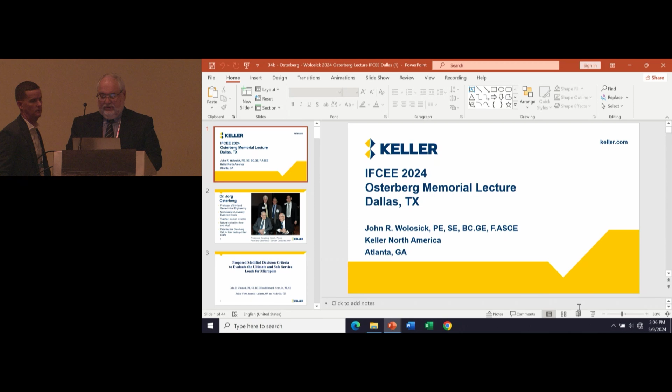Thank you, Paul. Let me figure this out here real quick. Oh, does it keep going? Yeah, no, I think I'm okay here. I think I'm good. Okay. Okay? Yeah, got it, Matt.

All right. I was telling Teresa ahead of time, I'm usually a wing-it guy, but in this particular case I probably over-prepared. But I'm honored to give this talk. As Paul mentioned, a lot of great people have given the talk in the past, and a lot of them are friends of mine - Dr. Erik Loehr from the University of Missouri, Paul Mayne that you mentioned from Georgia Tech, and Jean-Louis Briaud from Texas A&M. So really pleased to be here.

My comments about Jorg Osterberg are that he was a game changer in the deep foundations industry, professor of civil and geotechnical engineering at Northwestern in Evanston, Illinois. He was a fantastic teacher, mentor and inventor. And Paul mentioned he invented the Osterberg cell, which was a total game changer in the deep foundations industry, particularly for drilled shaft foundations. He patented it, and that find also started the company Load Test. This is a great photo taken in 2007. In the back row are three of his former colleagues at Northwestern, Dr. Chuck Dowding, Dr. Ray Krizek, and Dr. Rich Finno. And a lot of you will recognize sitting next to Osterberg in front is Dr. Ralph Peck. So this was at GEO Denver in 2007. And I'm really happy to be here, as I said.

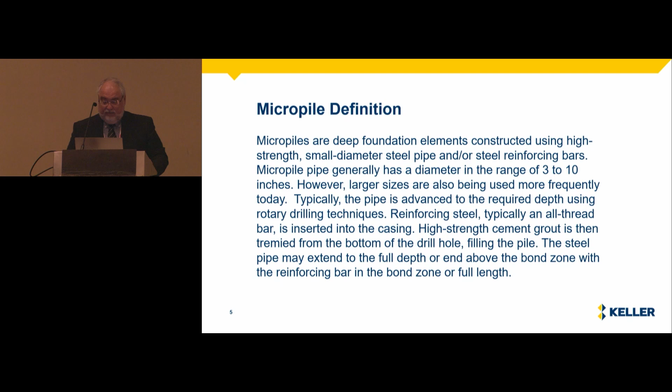So we flush in this system, and the flush comes out bringing the drill cuttings. We drill through the unsuitable materials down into the denser materials.

When we reach that bottom, we put a Tremie pipe all the way to the bottom, and we pump it from the bottom up full of cement grout, high-strength cement grout. And then we also lower, typically, a steel reinforcing bar, an all-thread bar, and then we reverse and start bringing that pipe out. Oftentimes this lower zone, particularly if it's sandy, will be pressure grouted.

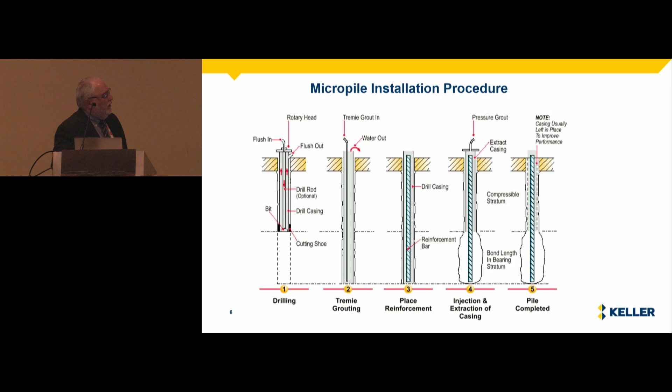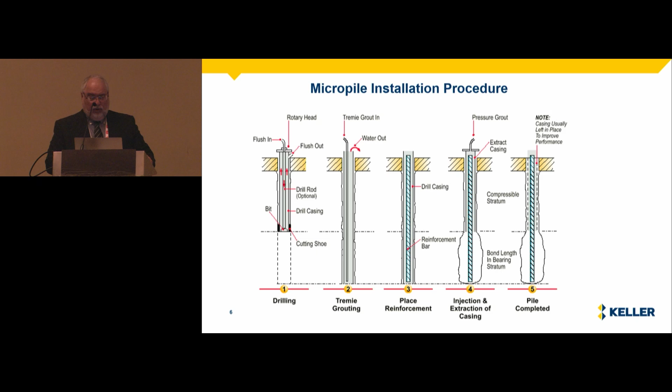It can either be pressure grouted through the head of the drill rig, or we can come back and do what's called post-grouting if we put a post-grout tube in. And then typically when we get up to this softer zone, we stop. In some cases, for economics, they might remove the casing. I'm not a big fan of doing that, but that's a typical installation process for a micropile.

So during this talk, I'm going to be using some terminology that I first established when I wrote a paper with Seth Pearlman back in 1992. It's basically a classification where we're looking at soil piles and rock piles, S and R.

The type 1 piles, both soil and rock, the S1 I just described to you in the previous slide, but it's basically an upper casing that's filled with grout and a lower pressure grouted bond zone that has a centralized reinforcing bar in it, and then some development length up into the casing, and that's a very common type of installation for micropiles.

The S2 pile is almost never used. I've only used it a few times in my career, but we were using it more in the early 90s, and it's a pile where we're looking at limiting deflection in soils, so we get more area of steel in this lower bond zone if we put pipe all the way down. But you have to pressure grout, and then you have to actually drill this pipe back through the pressure grout, which is difficult to do, so most contractors don't do that. So this is a bit of a unicorn.

The R1 pile, R for rock, is where you drill down with the outer casing with the cutting shoe, but when you hit the rock, you typically will refuse, so it stops at that point. So we go inside that pipe then with another drill tool, and we hammer out a rock socket, as shown here. When we do that, we then put the Tremie tube down, fill that up, and then we drop this steel bar in place.

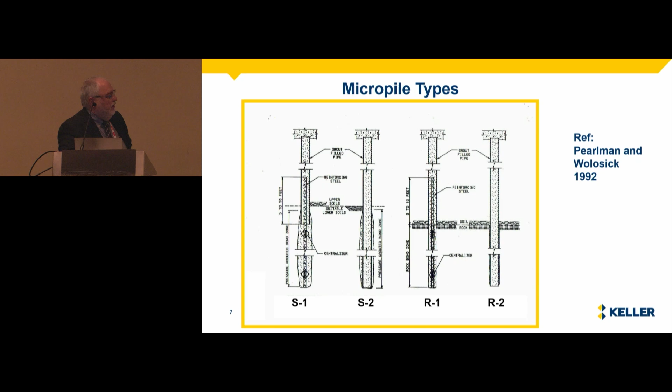The R2 pile is fairly common, and what we do in that case is we go down with 2 sets of tools, and we drill out a bigger rock socket, and then we put this steel pipe all the way to the bottom, fill it with grout on the inside, then typically we'll pick this up off the bottom and rotate it some and bring it back down again and make sure we get grout on the outside of the pipe as well. So S1, S2, R1, R2, keep that in mind.

So my talk is about micropile acceptance criteria from load testing. Many of you are probably familiar with the FHWA Micropile manual, the reference manual. This is the latest version. It's being rewritten right now by GEI consultants, and there will be some updates coming up very soon.

But under this particular publication, which has been around since 2005, if you look at what they talk about for acceptance, they say you can use this method where you're looking at the slope of a line, and when you hit that slope, that should be your failure criterion. At the bottom, you can see they talk about the Davisson criteria, but they say it hasn't been evaluated. And I'm the type of guy, when somebody says it hasn't been evaluated, I evaluate it. That's what led to the talk that I'm giving here today.

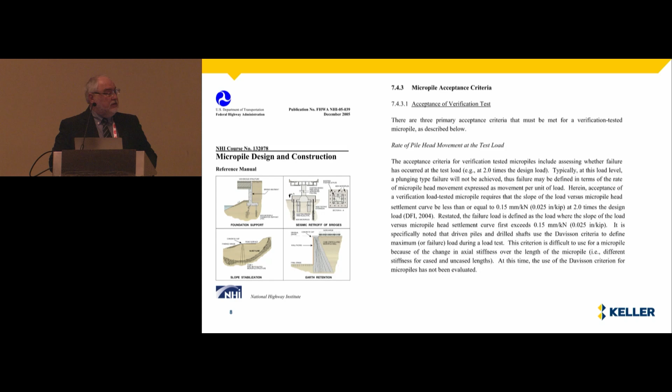So this is a manual that's used for public works, right? For federally sponsored FHWA type US DOT work. In the private sector, we use the International Building Code. So this is something that's monitored, developed by the structural engineers throughout the US.

And when they talk about load test evaluation, they give you these choices here, but you can see number 1 is the Davisson criteria. So we've got the federal government saying it hasn't been evaluated, and then we've got the structural engineers and the building officials saying this is the number 1 method that you should use.

So a little bit of a disconnect there, but once again, it leads along in my story.

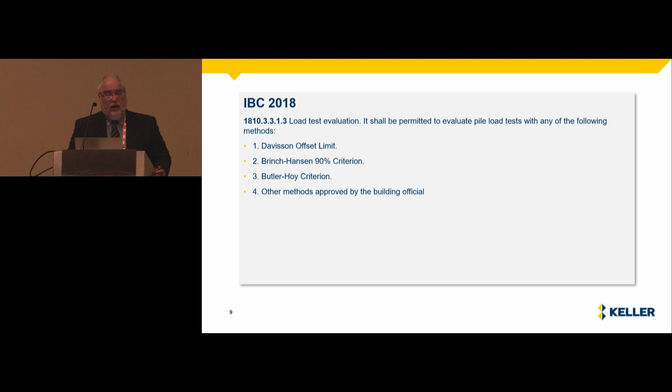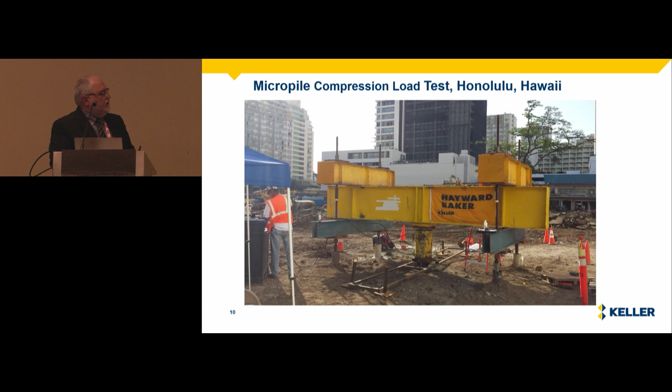So what is a load test on a deep foundation, typically if you're not using an Osterberg cell for a drilled shaft? I wanted to show you a compression load test is a complicated thing. You have to use reaction piles. There are 4 reaction piles here, from a project in Honolulu, Hawaii we did in 2015. Those are tie-down anchors, and then we have a cross beam and reactions, and we put a hydraulic jack in and push in compression, and we measure the response of the pile under load. This is to try to prove the capacity of the pile. So this is a compression test.

In micropiles, we often do a tension test because it's less expensive. It's been proven very well that it's a slightly conservative result using the tension test, and it costs about half of a compression test. So we often use tension tests to evaluate micropiles. This is also one in Hawaii, but a much simpler test. There are no reaction anchors. You can just set your reactions on the ground, and you pull on the pile and measure the response.

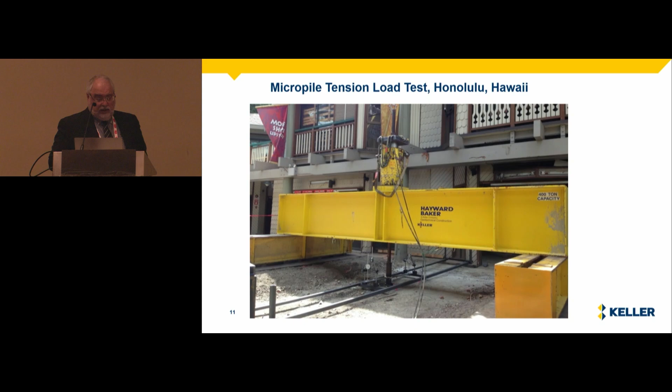I hate when people put a slide up and read it, okay? But when somebody writes something that you're talking about and it's really important, these are Davisson's words from his original 1972 paper, and I'm going to read them to you because it's critical for the discussion here today. One of the things I like and laugh about is when references from the 50s, 60s, and 70s have words like, 'it has been found that.' That comes up twice in here, and these days I think they make you prove it more than just saying it, but when he said it, he meant it, and these are his words, so please listen.

It has been found that an offset criterion similar to that used for some metals can be specified for determining ultimate load. Now, I don't know what that means exactly—some metals, I think he's talking about material science, perhaps, which I know he was very keen into steel, but that's his statement. The criterion has been developed for the point-bearing pile by considering the deformation required to cause yielding of the soil at the pile tip.

This deformation is known as soil quake, designated Q-tip. For piles of normal dimensions, approximately 1 foot wide, Q-tip is approximately 0.1 inch for most soils. It has been found that when the pile settlement is 0.15 inch plus Q-tip below the elastic index line, the ultimate load can be presumed to have been reached. This settlement criterion can also be applied to the friction pile.

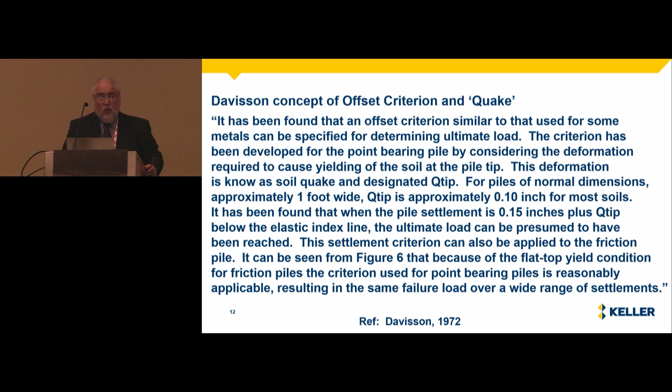It can be seen from Figure 6, which is my next slide, that because of the flat top yield condition for friction piles, the criterion used for point-bearing piles is reasonably applicable, resulting in the same failure load over a wide range of settlements. So that is the Davisson criteria.

So Figure 6 that I show here is also in the 1972 paper, and basically he covers his criterion, which is first taking the elastic deflection, which is just Hooke's law or elastic theory, delta equals PL over AE, and plotting that elastic criterion in a load settlement curve, then adding 0.15 plus the Quake. He shows in this particular diagram that point bearing is what he has assumed in his initial discussion, but if you look at friction, point bearing, or point and friction, they all cross at the same line, which is the elastic line plus the 0.15 plus the Q-tip.

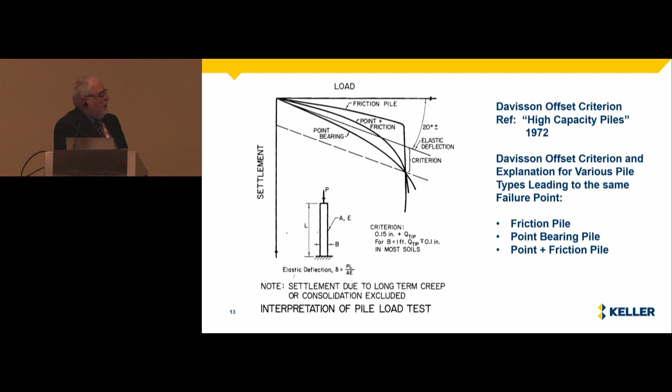So he's saying that in his experience and all the load tests he's looked at, it doesn't matter what type of pile you're looking at—they may have a different load response. You can see, for example, that the friction pile is much stiffer initially, but it has what he calls a flat top failure loading. So they all cross at the same point, meaning it's good for all types of piles. This is a very simple criterion, and I find that things in life that are simple are beautiful, and I like it.

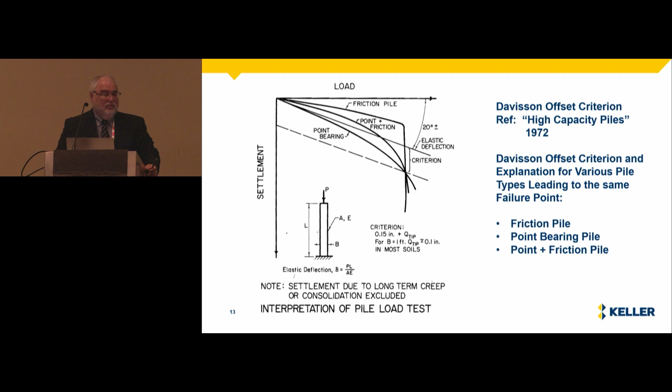So then in 1986, which was 14 years after he originally published this paper, there was a very nice one-page summary of the Davisson criteria, because in the '72 paper it was a little bit cryptic. But this has a nice little 7-step procedure of how to apply the Davisson criteria.

And so it's basically, once again, load versus displacement. I hate it when people plot the load going the other way, because you push down and things deflect down. So this is the way I like to plot it. And so here's your load deflection curve.

Here's the elastic line, which is down here, the elastic theory, delta equals PL over AE. And then he adds the Quake and the 0.15. So these are small numbers. That's only a quarter inch, okay? 0.15 plus a tenth for a 1-foot pile. And then it's described further that you can use for your Quake the diameter of the pile divided by 120. That's what you'll find in textbooks on many of these projects.

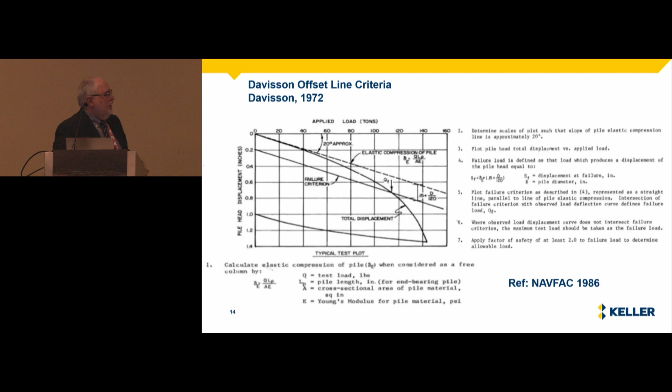It just has a 7-step procedure. He has some real good stuff here and here. For example, what happens if the pile doesn't plunge? And he says, well, in that case, just take the maximum load you tested to, divide that, and that's your ultimate, and divide that by 2. And that's actually pretty good advice.

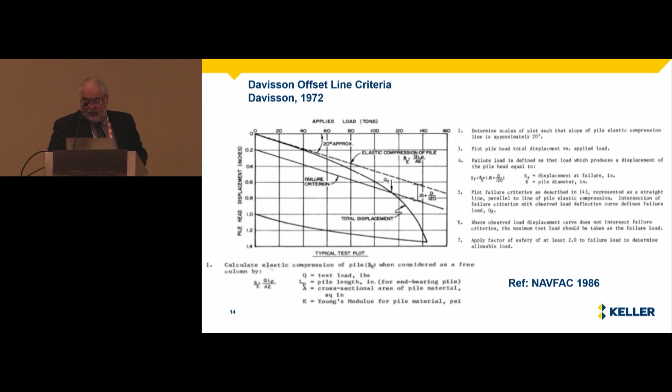So let's examine that Davisson criteria. It's the elastic deflection, and then this 0.15, which is 3.8 millimeters. This is my term, plastic deflection. There may be better terms for it, but it kind of makes sense right after the elastic deflection. Plus this Quake, which is the diameter divided by 120. And so that diameter divided by 120 allows you to apply this to different size piles.

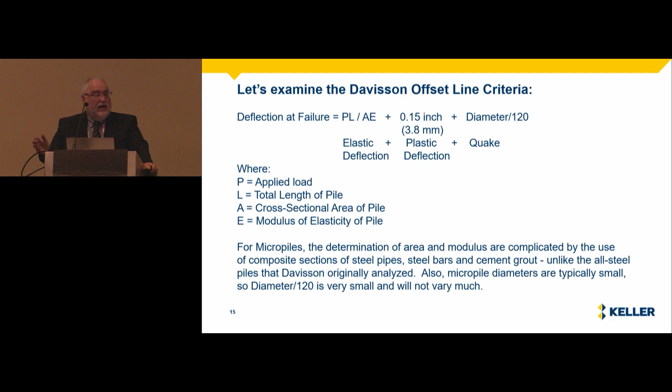These numbers, PL over AE, you're familiar with - the load, the length, the area, and the modulus of elasticity. So for micropiles, the calculation of the area and the modulus are complicated. It's not like when Davisson had a steel H-pile or a steel pipe pile, because you've got all these different components, right? You've got grout, you've got steel pipe, you've got steel bar, and you have to figure that out. Well, it turns out you can figure that out. So it's a composite system, and it's different than what he had.

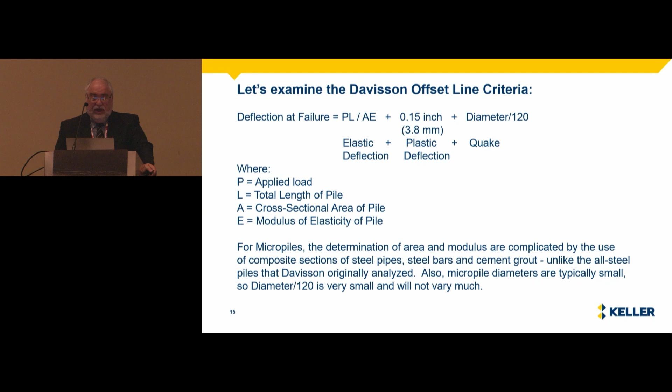The other thing that I want to point out is that for micropiles, if you're only in the 3 to 10 inch diameter range, this D over 120 number is a pretty small number, okay? It's much smaller than many of the numbers you would have on drilled shafts or auger cast piles, for example.

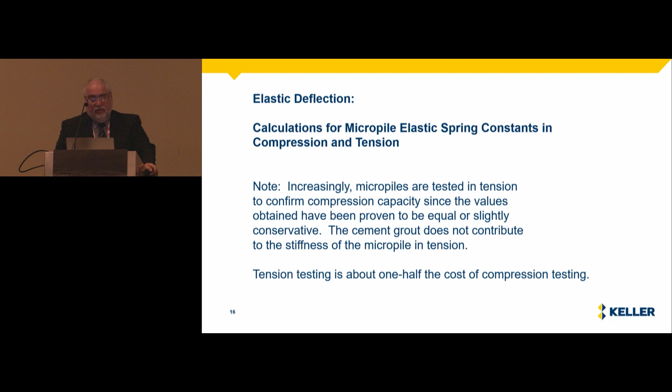So how do we calculate that elastic deflection for micropiles? One of the things I mentioned earlier is that a lot of times these days we're using tension tests. So I'm going to look at both compression and tension because tension testing is so economical. And when we look at tension - and this last sentence can be discussed ad infinitum - we're not going to use the grout in tension because it really does not contribute much to the stiffness. Now, it is confined in the pipe up above, and it is a matter for discussion, but I'm going to look at both elastic deflections in compression and in tension.

And for an R2 type pile, where we don't have the bar inside, we would just have no bar and we'd have all pipe and all grout, and so it would be the same in both cases.

So the other thing is, if we want to accurately predict the deflection - and this is a little bit of the tricky part - what we have to do is look at the load path, okay? So the load, if you put a load on this pile, we have development lengths of both the casing and the bar. So when you put a load on a bar in concrete, the ACI code has you calculate development length, and that development length is critical for the accurate evaluation of elastic deflection. So keep that in mind.

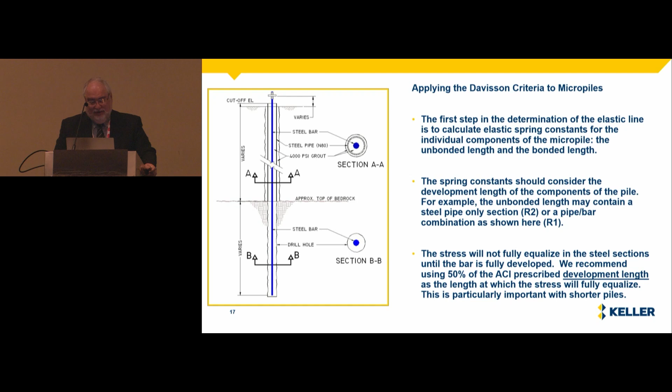So Dr. Hartman said this morning he wasn't going to show any calculations, but I'm going to break down and do calculations here for you. I'm not going to spend a lot of time on it, though.

So what about that development length? This is the old ACI code, from before 2019. These are calculations for development length in tension and compression. This was from our Hawaii project I showed before. You run the calculations and they vary from tension to compression, but for a 2.5-inch grade 150 bar that we used here, you got 12 feet in tension and 9 feet in compression. It's a little complicated, but not bad.

I'm old enough to remember that in the old days, all you did was use 48 bar diameters and you had it, right? But that's not the way it is anymore.

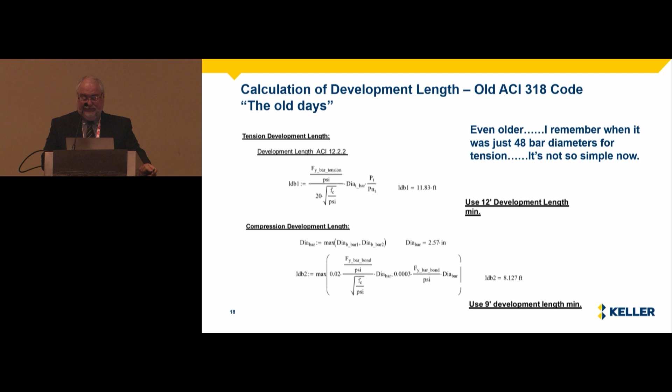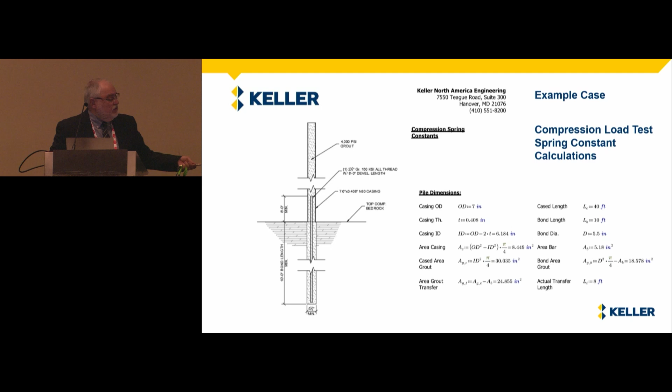So this was pre-2019. Let's look at this real quick—it'll be in the paper and you can look at it more—but this is an example case where we're going to calculate a compression load spring constant for this test case micropile. It's a 50-foot long micropile with 40 feet of upper length and a 10-foot bond zone, a 7-inch diameter, 0.408 wall thickness pipe, and it has a 2.5-inch diameter grade 150 bar in it. These are all the calculations for the areas, etc., and then the materials we're looking at here.

Now, a grade 150 bar yields at 120. That's a common mistake a lot of people make in geotechnical engineering—the 150 is the ultimate, so we're putting in 120 here. The grout strength is 4,000 pounds per square inch. We're using the modulus of steel, and we calculate the modulus of the grout from an ACI equation. Then we do a back calculation of the effective area of the bar, because it's a thread bar with different thicknesses depending on where you cut it. So the ACI code now has all of these factors.

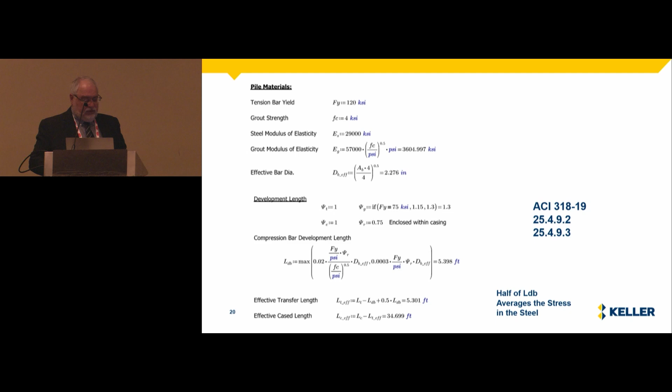They're psi factors, and they identify the grade of your bar, the spacing of your bar, the confinement of the bar, and there's one other one that's escaping me right now. It's a little more of a complicated equation, so in the end it's going to get longer, right? Because every code makes things a little bit more expensive. And as I mentioned, then we'll go and use half of that—we'll use a calculation to use half of that to get the right numbers.

So what we're going to do now to calculate these spring constants is use the modular ratio concept, which is well established in structural engineering for transformed areas, to calculate and arrive at the theoretical elastic deflections—in this case for compression, just as Davisson described, but he had a simple Hooke's law. We're going to do this between the upper unbonded length and the lower bond length, and come up with spring constants we'll call K sub U and K sub B, for upper and bond. It's basically the deflection divided by the load, L over AE—a deflection per unit load, a spring constant. So that's for compression.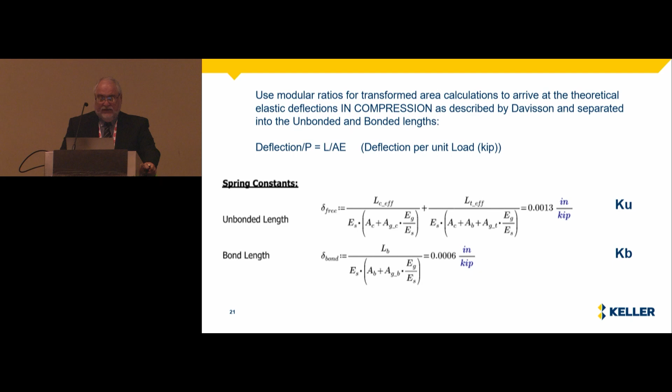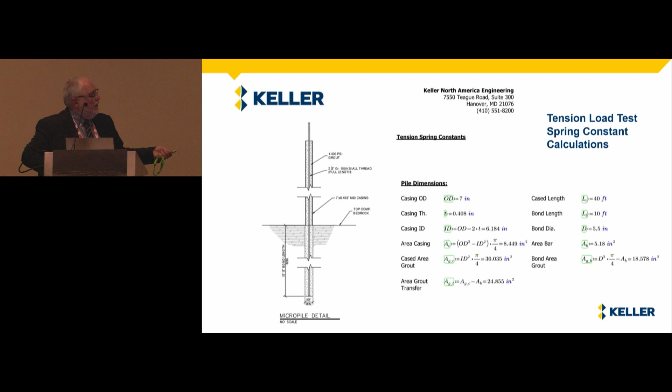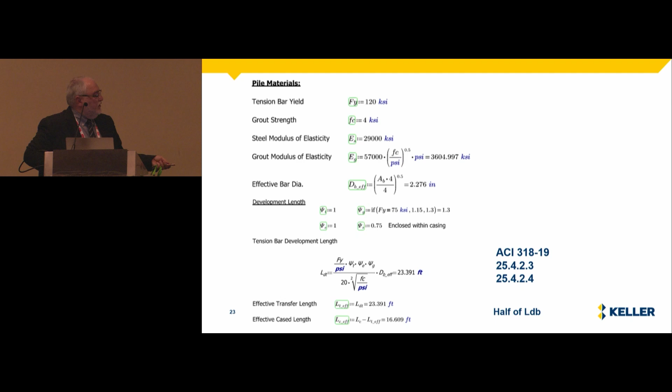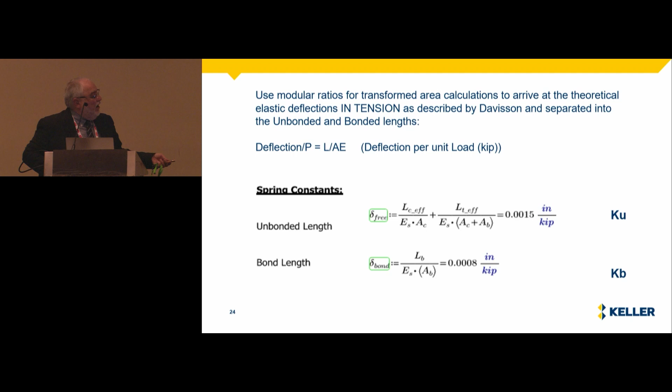In tension, because we have to test the pile by pulling on it, we run the bar all the way up, but we've got the same test case here, and now we're going to calculate the tension load constants. We go through the same thing—once again a different equation from ACI with the psi factors, and we get our values down here, once again modifying the development length. So once again we're going to use transformed area calculations, but this time in tension, to arrive at spring constants in tension.

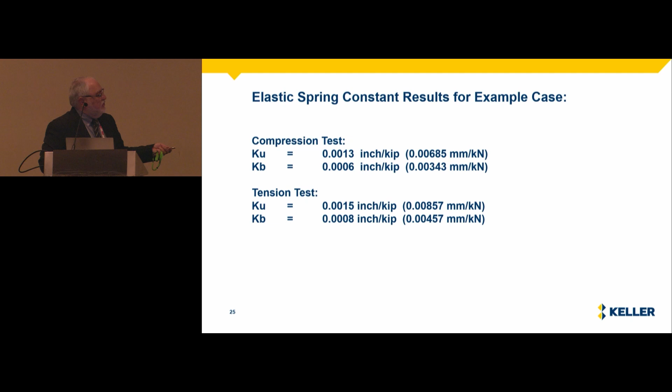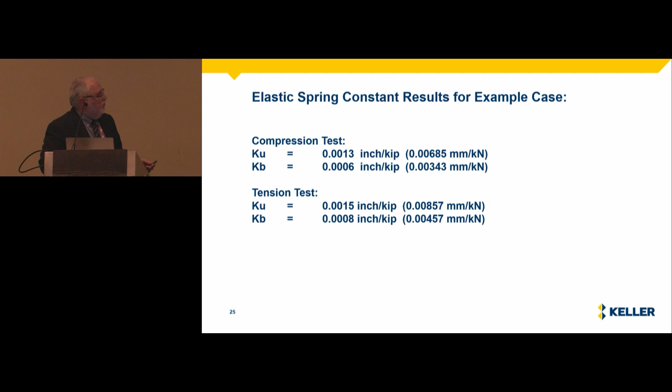To summarize that, the elastic spring constants for the compression test are 0.0013 inches per kip, and for my friends who use SI units, I've put the millimeters per kilonewton here. I apologize for the 3 significant figures, but hey, this is structural engineering. You can see the slight variation between the tension and compression results.

So that's our P over AE, calculated scientifically. So what about the number for Quake? What about that Quake number, okay?

This is a load test from a project in Puerto Rico. Funny, because Dr. Hartman had a Mayaguez, Puerto Rico project this morning, and this one was also in Mayaguez, but that's a total coincidence.

Quake is described by Davisson as the residual movement after the failure load has been reached. I like this diagram because in Puerto Rico the building code says you have to go to 250%, not 200 like we have here. This is a case in soft clay in Mayaguez, a fairly lightly loaded pile. We went up to 100% and cycled back to 0. 100% design load is here, 200% test load initially, and then we went to 250%. I've plotted my Davisson line, and we just reached it at that point.

If you think about it, Quake is that plastic deformation, and we can measure that in our tests. So if you do a micropile load test, you should always take it back to 0 and see what that resultant number is. At 200%, the permanent set was 0.092. At 250%, which is encountering the Davisson failure line, it was 0.154. So instead of that D over 120, we can measure that in every test that we do.

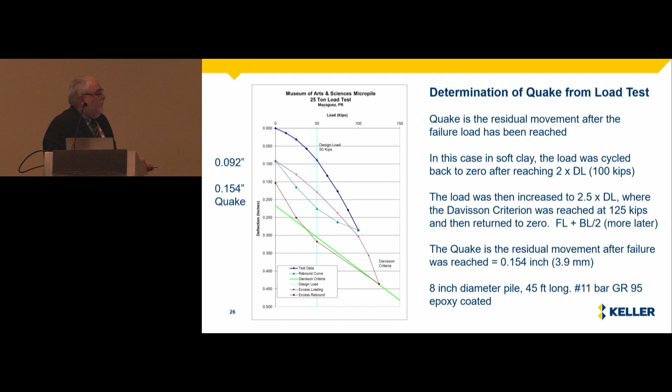But this is our Quake, we've just measured it from this pile load test. This happens to be a 45-foot long pile with just a number 11 grade 95 bar, epoxy coated, 8-inch diameter drill hole. So there is the Quake for this particular project.

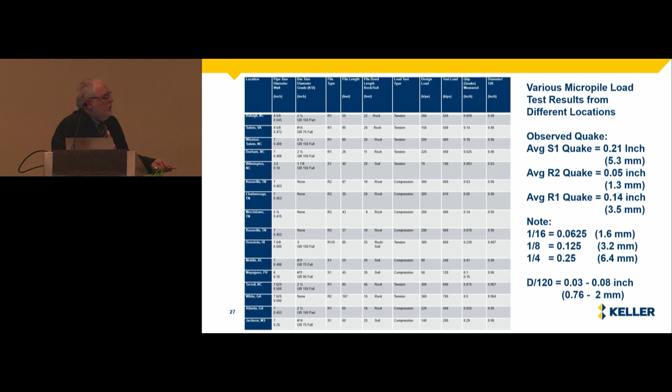Then the next thing is, at the end here, I have D over 120 calculated, and as I mentioned before, it's a very small number for micropiles.

So this is how I do it. This is how we do it.

We take the Davisson criteria, which is this equation here, and we use some presumptive values for the Quake. For the R2 pile, we had an average of 1/16 of an inch in the previous table. For the R1 pile, 1/8 of an inch, and there's the millimeter equivalents. Those are rock bond zones. For the soil piles, it's 1/4 inch.

So what we do is we calculate the spring constants for the upper and lower sections of the pile, as I showed in the previous slides. We run our compression or tension test to twice the design load. If the pile plunges, the failure load is where the test line crosses the criterion.

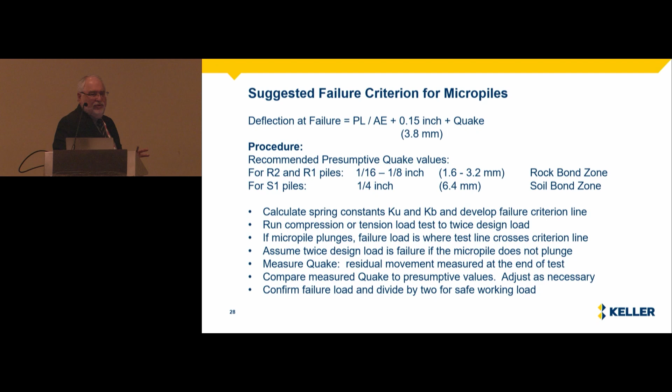Now, we're geotechnical contractors, and a pile load test failing is often a $100,000 boo-boo, okay? So we don't get a lot of plunges these days, but as Davisson said in his paper, if you don't plunge, assume twice the design load is your failure load if the micropile doesn't plunge.

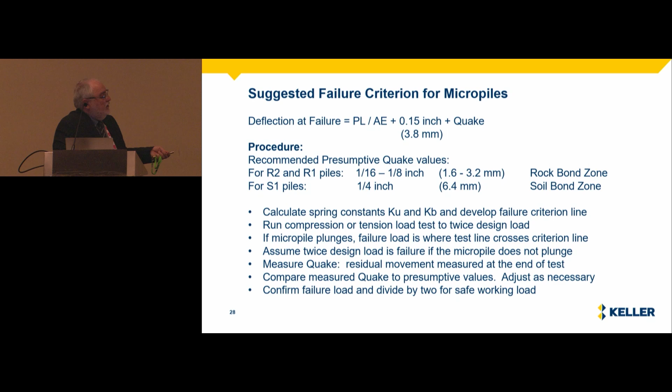Then you measure the Quake, that residual movement, and compare that to the Quake you used presumptively, and adjust as necessary. You've just tested the Quake, use it. But while you're running the test, you can use these numbers to indicate if you're having failure or not. Then you confirm the failure load, divide by 2, and that's your safe working load.

So this is the way I've done it for 3 decades.

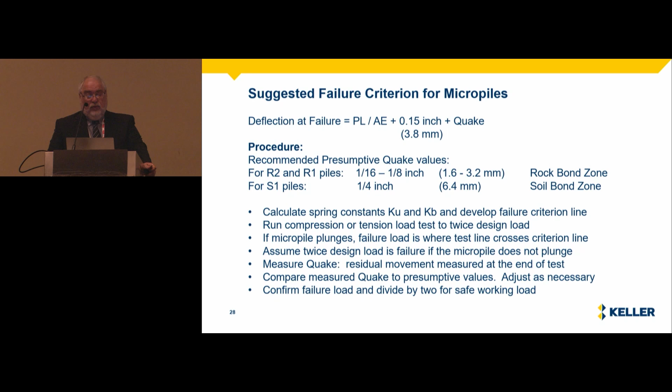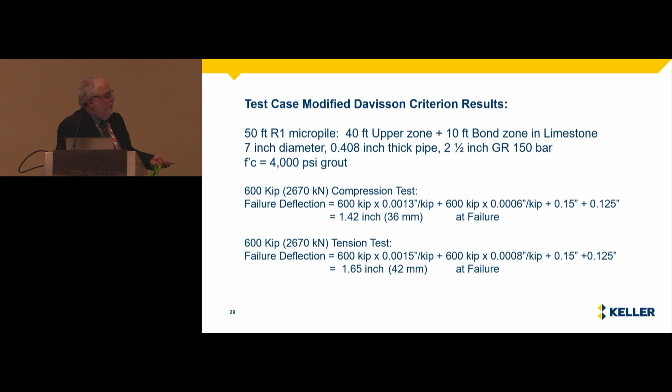So for the test case I showed you, this 50-foot R1 pile, if you put the numbers in, the test load is 600 kips, and at failure in compression, it's predicting 1.42 inches. That kind of makes sense for a failure load on a 600 kip pile. For a tension test, it's a little more because we're ignoring the concrete, it's 1.65 inches.

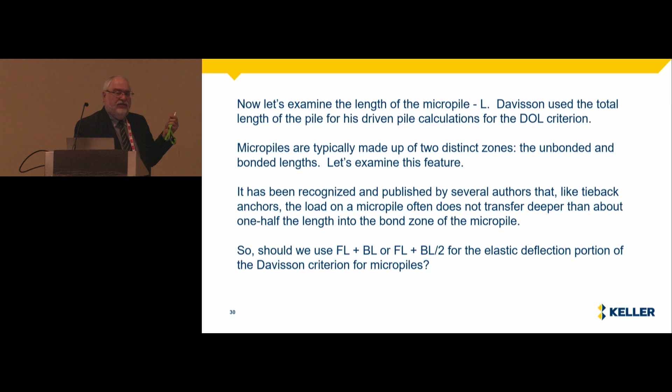So there's one other thing we have to look at, and that's the length of the pile. If we're using elastic theory, PL over AE, we have to look at L. So let's look at that, let's look at the length.

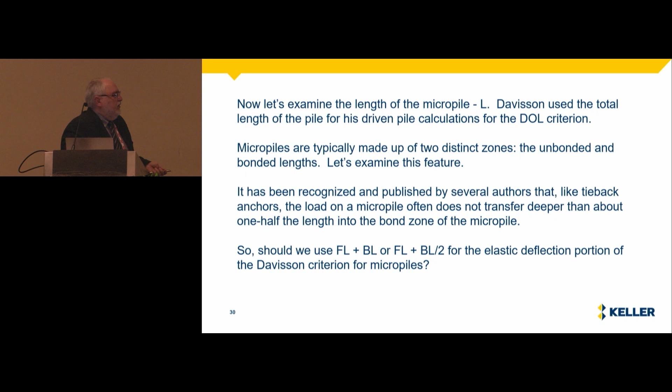We have the upper or free length of the micropile and the lower bond length. Several authors have published, and it's pretty well recognized, that oftentimes in micropiles the load only goes about halfway into the bond zone. And that's well recognized in anchors also. So should we use the free length plus the bond length for L, or the free length plus half the bond length?

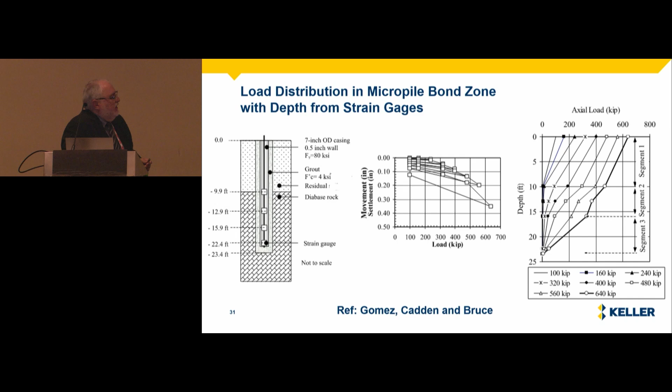So I grabbed a couple of papers. This is Gomez, Cadden, and Bruce, where they had some strain gauges just to illustrate this question. This is a short 13.5-foot bond length where they had strain gauges. If you line up across the way here, they took it to a very high test load, and they've connected the dots here, but what I really believe is that this is more of an asymptotic thing down here. You can see the load doesn't, much of the load doesn't get to the bottom. This is a short pile.

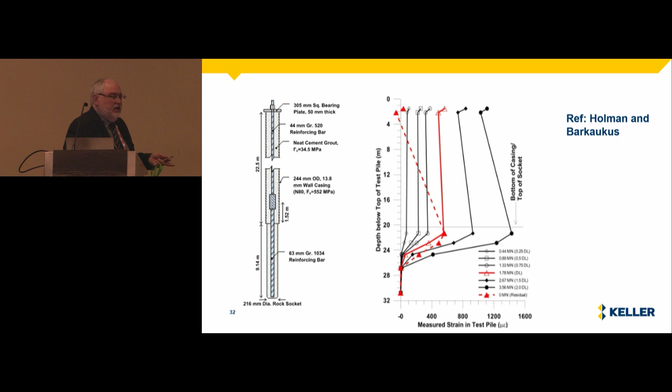A different reference, Holman and Barkaukus, where they have a 9-meter rather than the 4-meter bond zone. I should have mentioned, this is just a 4-meter bond zone, so this is a 9-meter bond zone, a longer bond zone. You can see that the load doesn't get to the bottom, right? So the question is, do we use free length plus the bond length, or free length plus half the bond length? I'm going to talk about that more here.

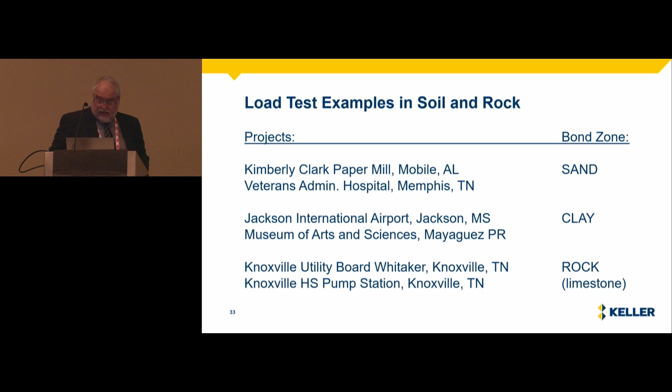So let's look at some load tests. I've picked out 6 different tests: 2 are in sand in Alabama and Tennessee, 2 are in clay in Mississippi and Puerto Rico, and 2 are in limestone in Knoxville, Tennessee. Let's see how this criterion works and what the difference is between free length plus bond length and free length plus half bond length.

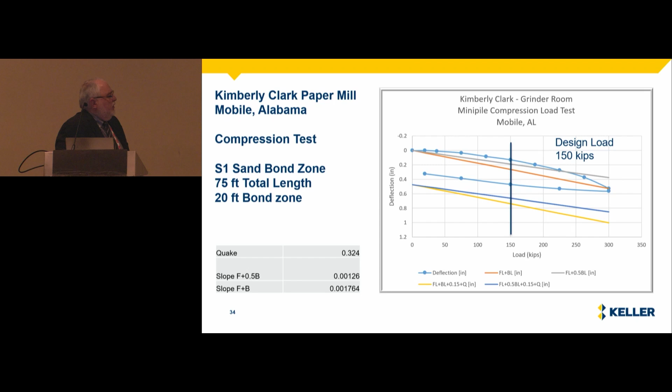So this is an S1 pile. It was at a paper mill in Mobile, Alabama. Design load was 150 kips, and we ran the load test. We measured the Quake, which was 0.324, our rebound here. And if you look at the bottom here, we've separated out the free length plus bond length in the orange, and then the free length plus half the bond length in the gray.

So I look at those 2 lines, and I plot them and look at the response I get. In this particular case, it looks to me like the free length plus half the bond length is better. But what we're seeing is that we're in the ballpark, that the response from the load test initially looks pretty good as far as determining the elastic line as described by Davisson.

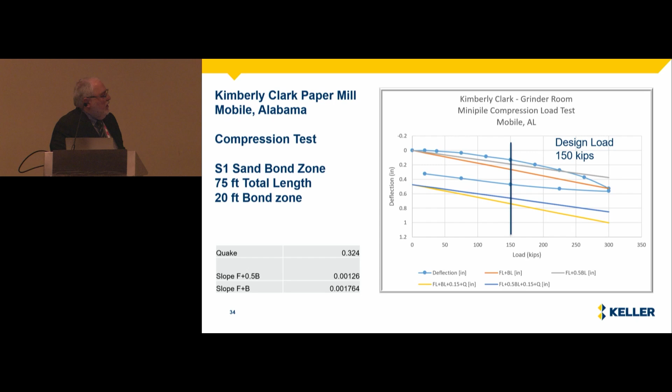I've taken this measured Quake plus 0.15, and we've drawn the parallel lines for the free length plus half the bond length plus 0.15 inch plus Quake, and then this is the free length plus bond length plus the failure criterion. This was a 75-foot long pile with a 20-foot bond zone. I think that looks pretty good. We're predicting this elastic response well.

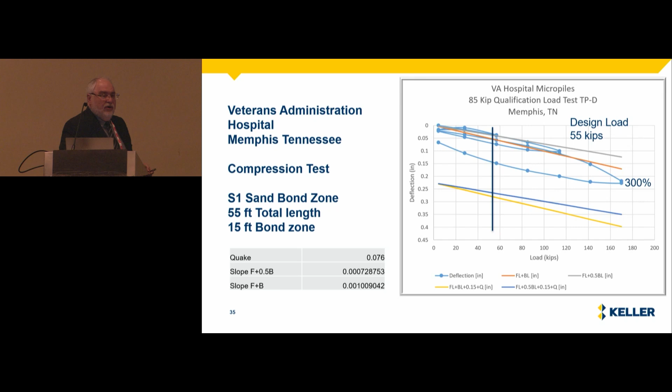You can see the offsets. Now this particular test was sort of a research test. I was trying to fail this pile. I took it up to 300%, and it started to bend over a little, but it never did fail. Once again, when you look at the response of this pile, this is the 200%, this is the design load here. We're in the ballpark with either one of these criteria, but once again, I think the free length plus half the bond length looks a little better.

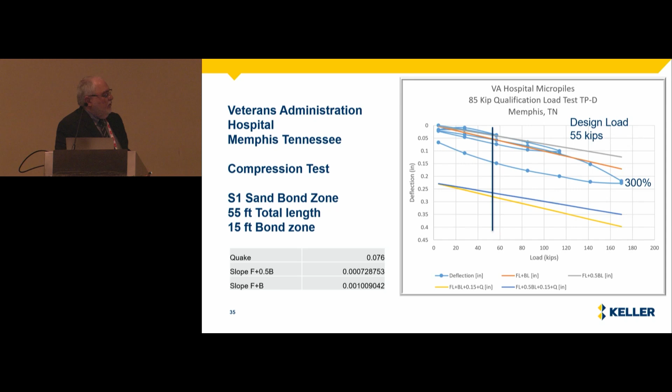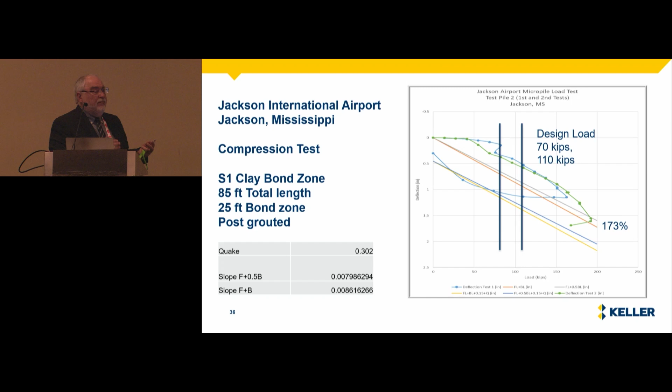Davisson mentioned the flat top yield in a friction pile. And so even though we're not following that elastic line, it comes back around just as he predicted, and comes down to the failure at this point. We didn't reach 200%. So this is a lesson learned: if you have piles that have a response above the elastic line, that means you're taking load in the upper or free length and it's giving you resistance.

This is another S1 clay pile, post-grouted, 80 feet long in Puerto Rico. We took this one because of the Puerto Rican code to 250%. But you can see, once again, we're in the ballpark here at the beginning for the elastic line. And then we've circled this around. The Quake is 0.154. And then we've plotted the free length bond length and the free length plus half the bond length, and shown those offsets as shown here.

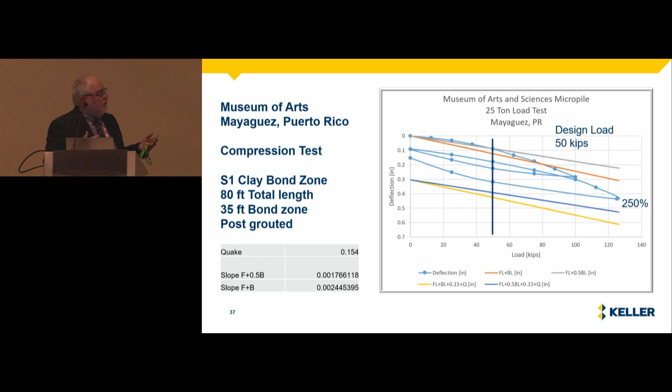So I think this is a very reasonable way for the engineer of record to assess the performance of the pile and determine what the safe working loads are on a micropile. So here's another one. Now we're going to move over to rock piles. This is a limestone pile, 45-foot pile with a 15-foot bond zone in Knoxville, Tennessee. This is also a very heavily loaded pile. Test load was 1,200 kips on a micropile.

But once again, you can see here that we're way above the elastic line. And the other interesting point is that the quake was 0. There was no quake, because the pile is just a rubber band. It's got a 15-foot rock socket in solid limestone. Where's it going to go? It can't quake, right?

So what's also happening in this case is, in Knoxville, in this particular project, this was a tank, and it had some very heavy loads, but the soils were not that bad. It was a pretty decent clay, so we were getting a lot of load resistance in that upper zone, but there was no way they could meet their settlement criteria for this heavily loaded tank.

That's why it went to deep foundations. That's why we're way up here and not anywhere near the line, but it gives you the elastic lines, and it gives you a reasonable way to look at it and interpret the response of the pile.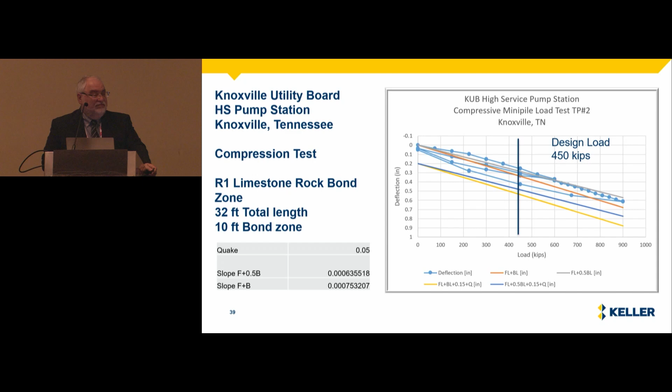And it's just a big rubber band, right? Where's it going to go with this rock socket? You push on it, it deflects. You take the load off, the deflection comes right back off again. So once again, I think a really good and a very high design and test load, 450 and 900 kip test load. So it just, in my mind, shows you that the way we're looking at it works.

The last comment I have is about creep. In soil piles, of course, you worry about creep, and Davisson talks a lot about creep in his publications. I grew up in the anchor business, so we have the creep test from the PTI manual. This is an excerpt from that PTI manual that tells you basically you put the load on. In tiebacks, it's usually 133%, but we're testing piles to 200% because we don't test every one of them too, right? So I like the PTI manual criteria, but we do it at 200%, not at 133%.

So it allows you 1 millimeter of movement over the first 10 minutes. If you exceed that 1 millimeter, you're allowed 1 more millimeter for the next 50 minutes, up to an hour. Above 2 millimeters creep in an hour, it's a failure. So this is a pretty stringent criteria. We plot it up this way in our software that we use in our load testing. So once again, creep's important. You need to check it, particularly in soil and clay piles, and this is what I recommend for that.

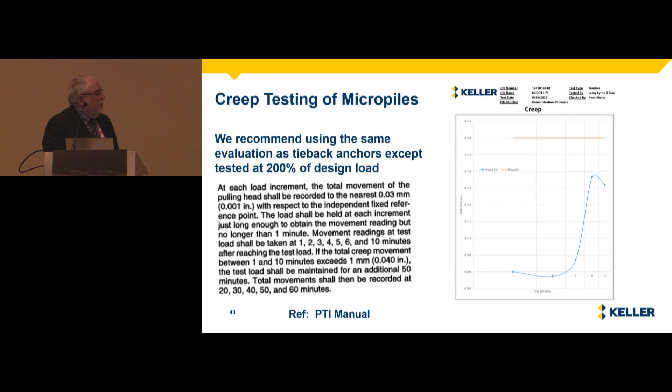So I think it should be left to the judgment of the geotechnical engineer to evaluate the load test data and see if it matches his design. It's up to him or her to evaluate, and I show both on mine, both the free length plus bond length, 100% bond length, and free length plus 50%. The Davisson criteria seems to do a pretty good job to me, but it doesn't work as well for auger cast piles and for drilled shafts.

But in 1993, Davisson had a paper at the Case Histories Conference in Missouri called Negative Skin Friction on Piles and Other Design Considerations. Those other design considerations he talked about in the middle of that paper were referenced by Tim Siegel and Morgan NeSmith in their paper about auger cast piles. He says for drilled piles, the quake number should be 2 to 6 times more than my original criteria said. So if you look at Morgan and Tim's paper, and use the evaluation they want, if you use 4.5 times the quake, you get exactly what you need for auger cast piles. So I've always believed that the Davisson criteria was applicable.

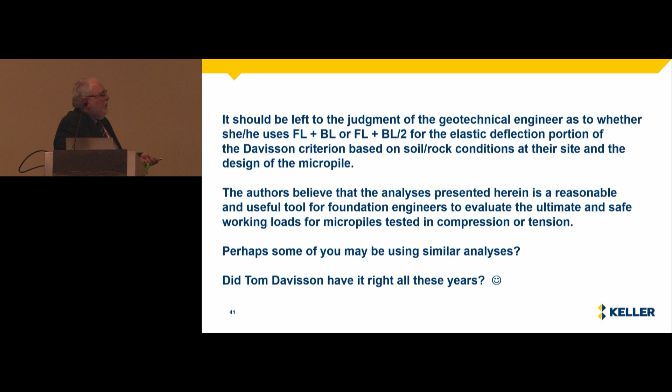So we think this is a reasonable and useful tool for people to use to evaluate load testing results in micropiles. Maybe some of you do something similar. We've got a lot of smart people in this room that have been looking at micropiles for a long time. My question is, maybe Tom Davisson had it right all these years after all.

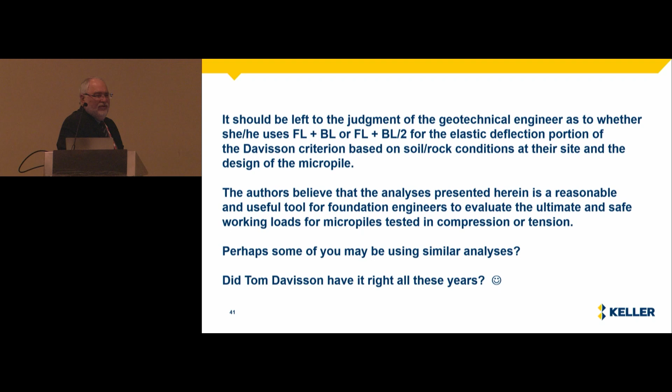So as I mentioned, we're going to write a paper about this and submit it to DFI, and I really appreciate the opportunity to come. Thank you very much.